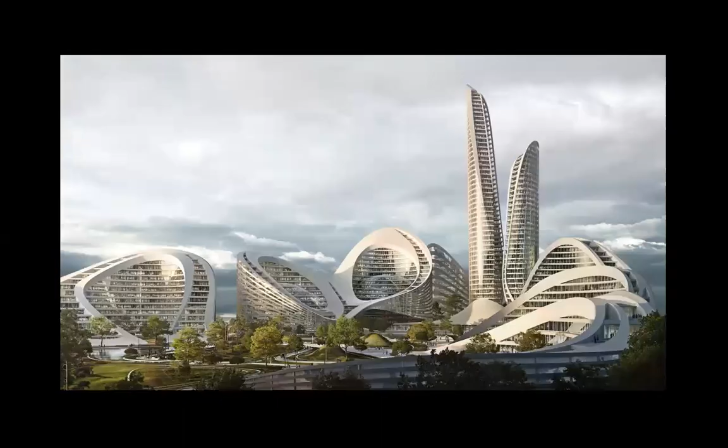The Russian mega smart city, Zaha Hadid Architects working in collaboration with others - I made this presentation before the start of the war. I personally am not very fond of this work. I find it flamboyant and not in the best taste, but that's what they proposed about 8 years ago or so.

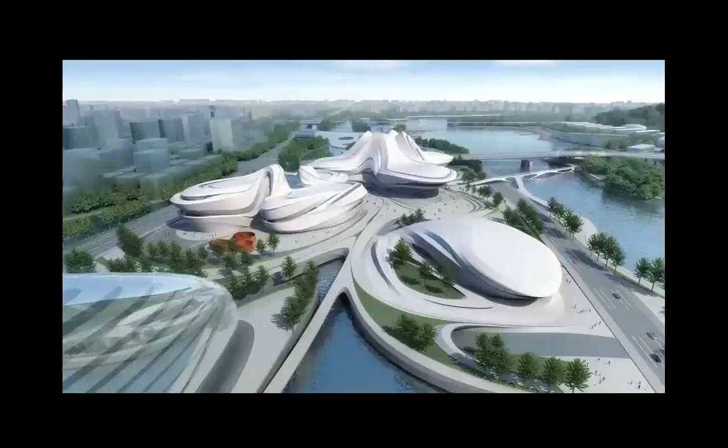This is a project in China. It's a very fine YouTube video that they created for this complex of buildings in China. Again, these are projects that began while Zaha was still alive, and developed after she died at 65.

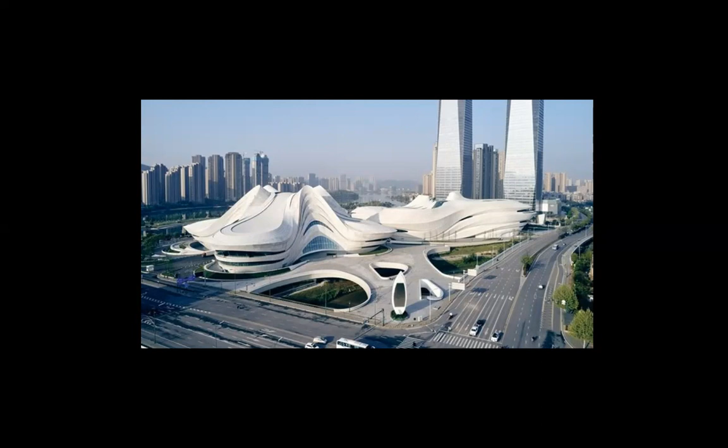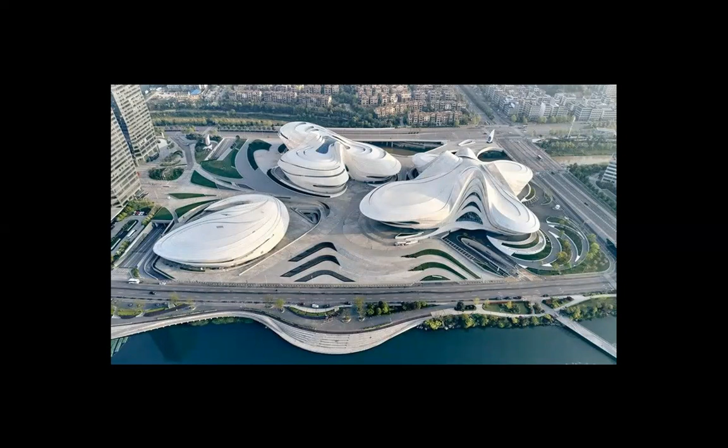What do we see here? Total fluidities and fluid totalities, to use the titles of two books published in Vienna at the Institute of Architecture by the studio run by Zaha Hadid for almost 20 years, with works of international students, 6 of whom were Romanians, published in a book I have. Anyway, this is the work in China - I don't know exactly, maybe some kind of cultural center.

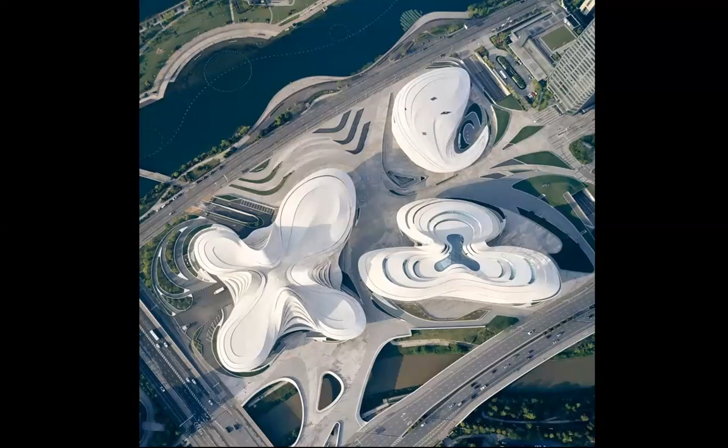The influence of Patrik Schumacher on Zaha Hadid was increasingly substantial. Five Zaha Hadid design projects were still to be finished following the architect's death.

Morpheus Hotel, finished in the meantime in Macau, was built with an exoskeleton. The structure is at the periphery of the building, and there are no columns in the interior.

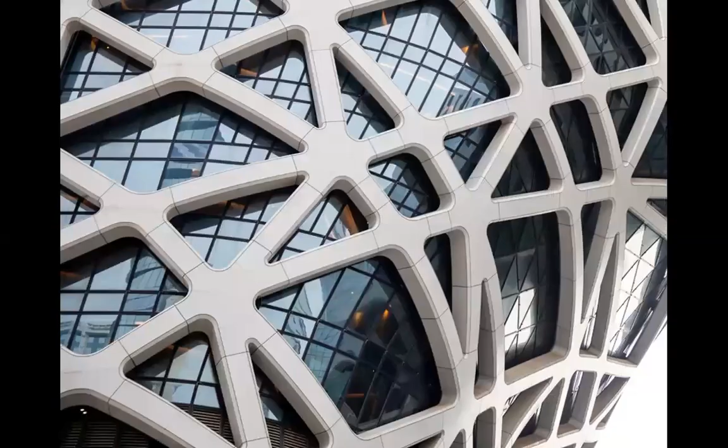Can you do this in the absence of scripting, programming and parametric design? Of course not. Impossible. You can't even dream it. You cannot draw it. You have to have very advanced digital knowledge in order not to build, but even to draw something like this.

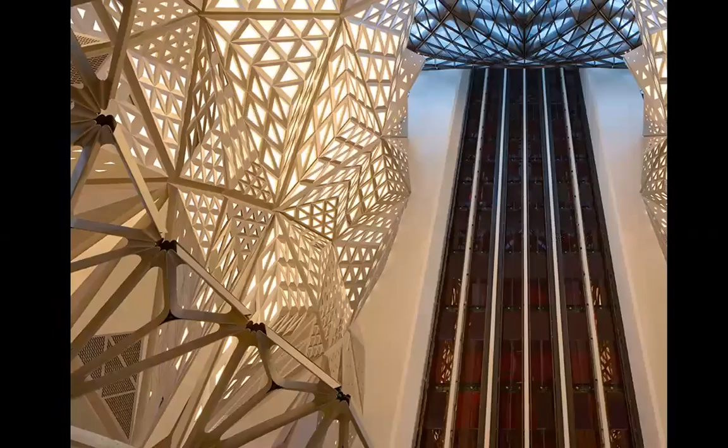A very fine work. Too bad that, yes, it is addressed to an elite. This is not for proletarians, but I guess beauty shouldn't be ideologized.

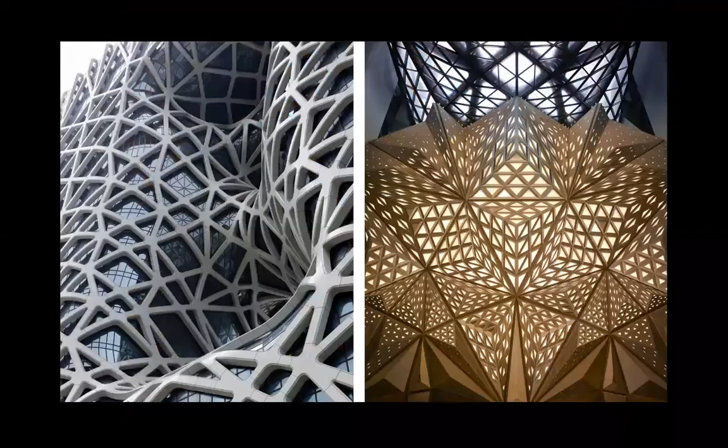Zaha Hadid and Patrik Schumacher, and of course the whole office - the work was finalized after Zaha Hadid died in Miami at 65.

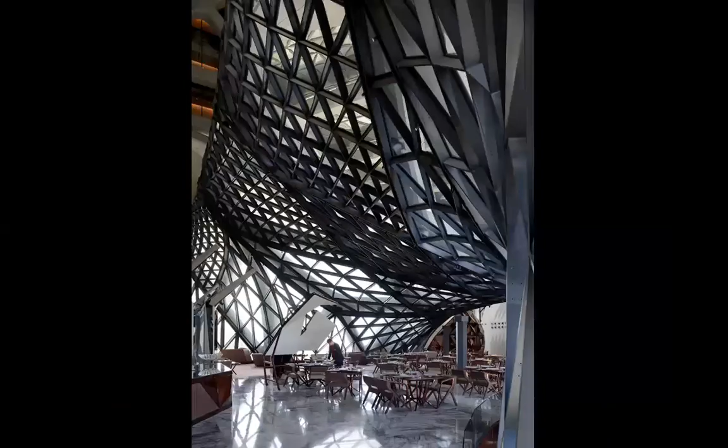Macau Morpheus Hotel.

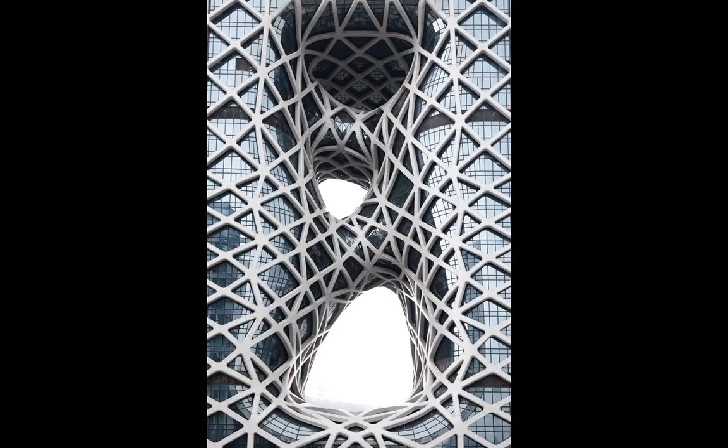Again, someone might ask what justified those holes or complexities in the center of the building. Well, this is art - you could explain it, but it's beyond the point, actually. Capriciousness and subjectivity is part of artistic creation, and it always was.

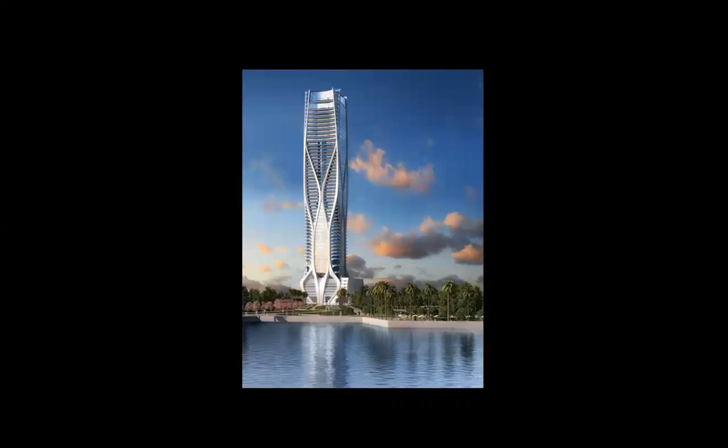She died while visiting the construction site of this building, 1000 Museum. It's not a museum, it's an opulent apartment building, very large, too explicitly phallic in my opinion. But there are some good parts, of course - very expensive, all this concrete work, which also pollutes.

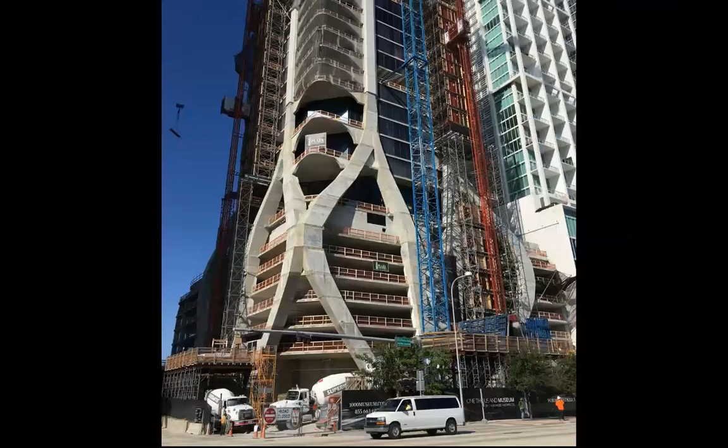But the building is still different from the left and right buildings, to an extent, formally at least. There are some dramatic parts here, which again were very expensive and employed a lot of concrete, and concrete does pollute.

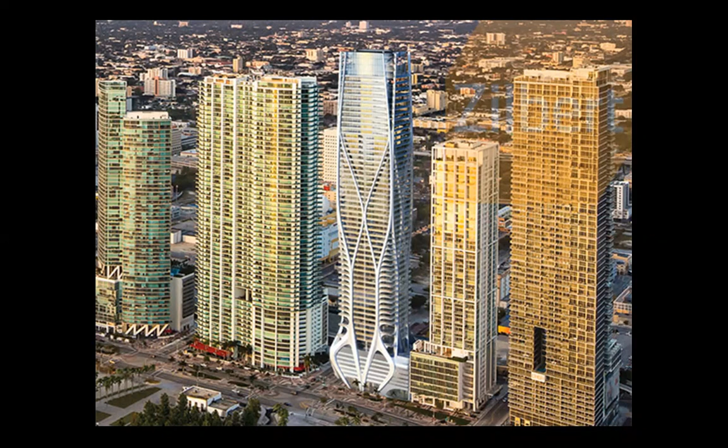Maybe her building is some kind of comment on the masculinity of the very idea of a skyscraper. I don't know. Maybe there is a subversive meaning in this building, and I hope it is. I'm not sure it is, but I hope it is.

I am a little bit skeptical that she tried to comment through her building on the masculinism of the other towers. I hope it is so, but I don't know - it's more wishful thinking on my side. But the building is more explicitly phallic than the other buildings, almost literally so.

For the rich and famous, for those who could afford an apartment here which costs millions, with balconies where you could have 100 people partying, it's built. And she died while inspecting the building site here in Miami.

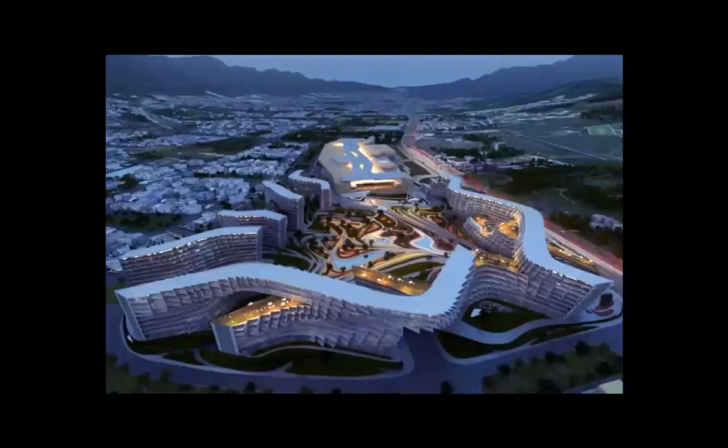Look at them. Again, for an elite in a country which knows something about poverty as well. There are many people who live in poverty, but those people would never even dream of owning an apartment in these buildings by Zaha Hadid Architects.

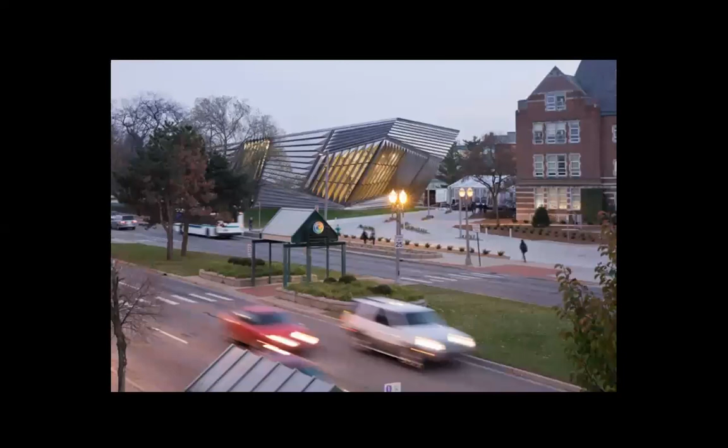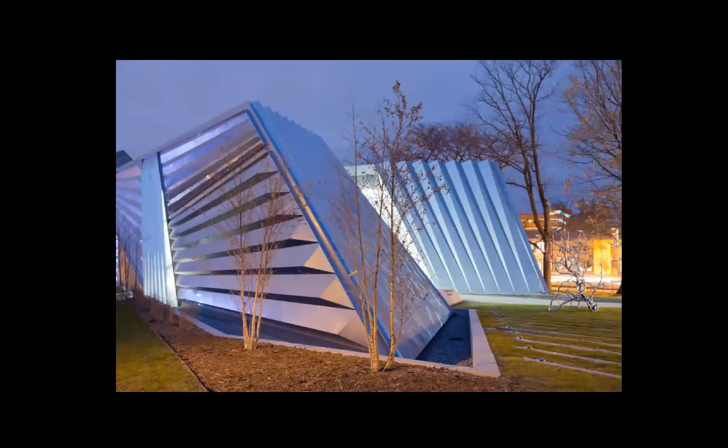And also the fact that it's not oversized. I think it's a good building in Michigan by Zaha Hadid Architects. I don't know if it was finalized only after her death. It seems so. Anyway, this is a video about this museum.

Now, Beijing New International Airport in China, it opened. In my presentation, when I made it, it was estimated it will open in 2019. It already opened, to cope with growing outbound traffic, after a record 4 billion trips were taken by Chinese tourists.

Anyway, China is building what is touted as the world's biggest airport, unofficially called the Beijing International Airport, and it is huge, and I like it more during the construction. Designed to look like a phoenix spreading its wings, construction was delayed in December 2017, last year, when more than 200 tombs from the Qing dynasty were unearthed during construction.

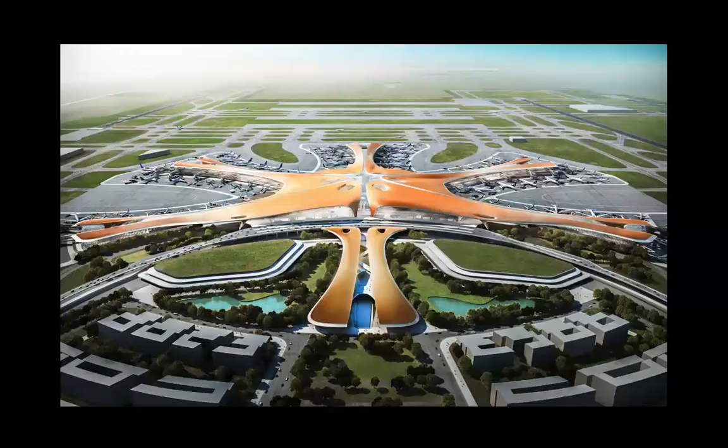And this is the airport which was built. It was very, very impressive during the process of erecting it. It's still impressive, and it is apparently the largest airport in the world. And there are so many impressive and large airports.

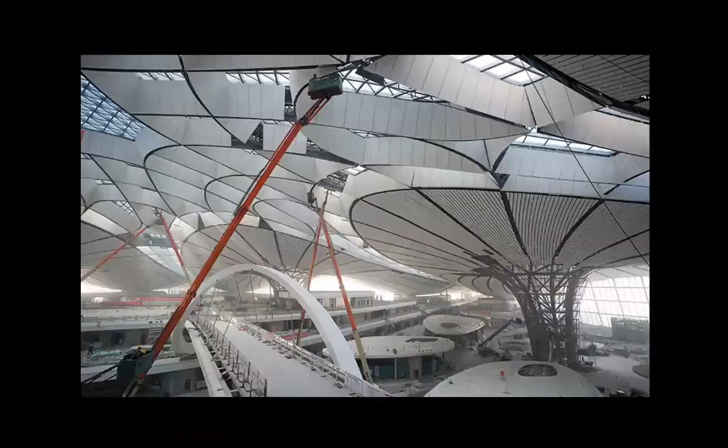If something bothers me, it's the glittering surface on which the billion tourists walk. Can you imagine an army of cleaning people would be needed to keep this shining floor still shining? I personally don't like the final result as much as I like the building during the construction, because at the end, everything is a little bit too white for my taste and too slick.

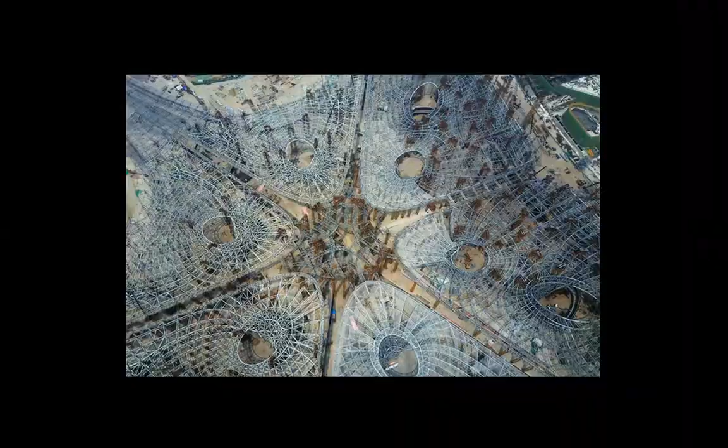But during the construction, this airport is out of this world, was out of this world. And now you'll see some images during the construction at the building site. These were, anyway, let's hope. Yeah.

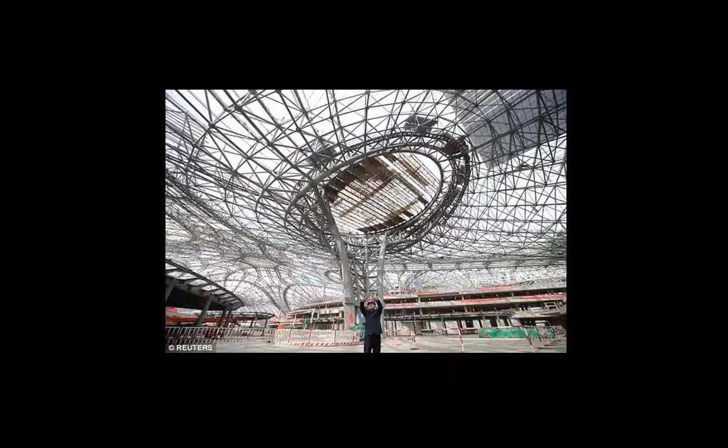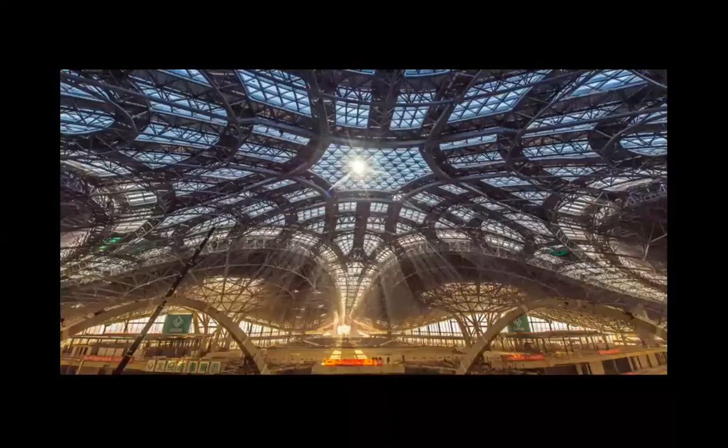I mean, yes, a very expensive building, no doubt. But the complexity of the structure is breathtaking. And what they were able to achieve in their office to create the project for this massive building. Look at this, just the steel structure of the roofing is unbelievable.

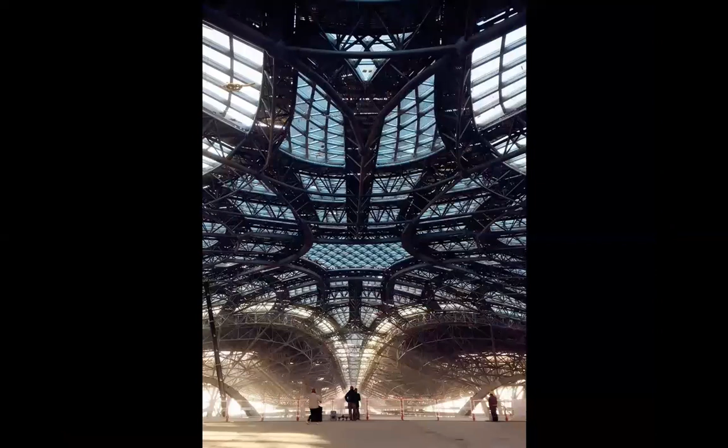Too bad it's not so visceral and so explicitly breathtaking and so provocative, even through its darkness, in the final iteration. But I think even l'ingénieur Eiffel would have loved this very much if he saw it.

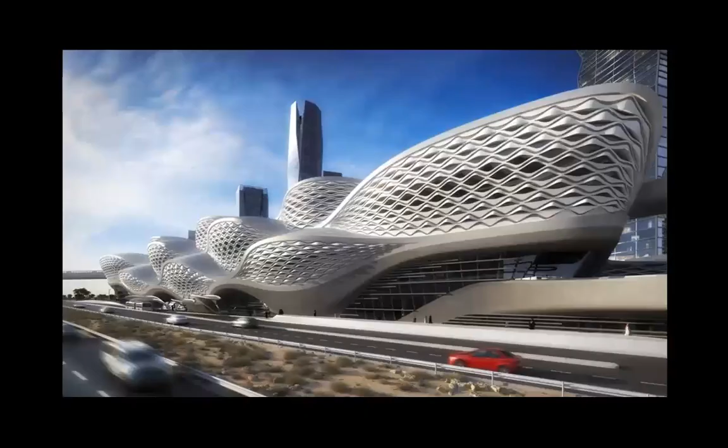This was a project, but it was realized later in Saudi Arabia, a metro station. Someone wrote: beautifully designed project, has all the distinctive trademark curves of a Hadid structure. For my taste, it's a little bit rhetorical, if not demagogical. I mean, should a subway station look like this?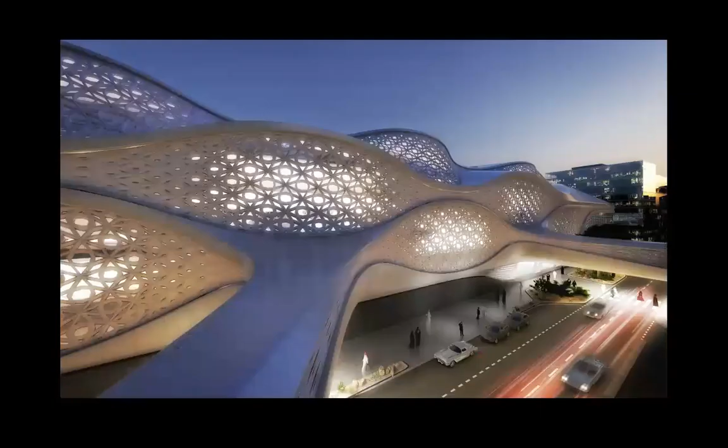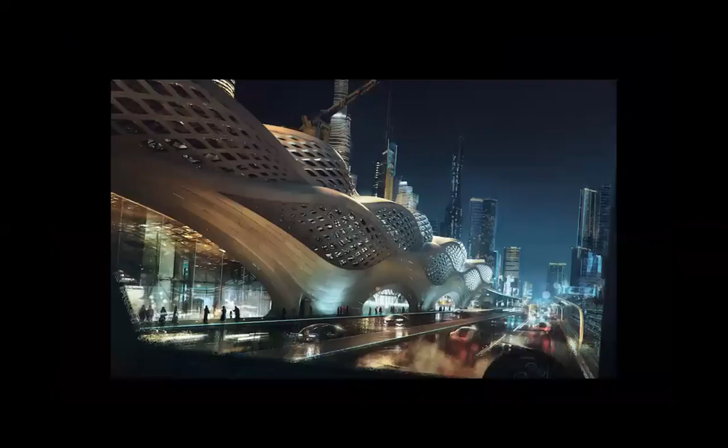I don't know. We also see the appearance of ornament. Ornament is very explicit here. In many of the later works of Zaha Hadid Architects, ornament does appear.

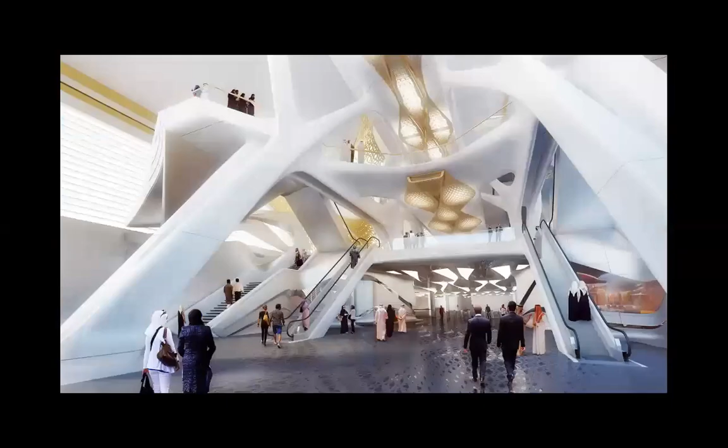The project, it was built. I don't have the latest pictures. Again, in my opinion, too much whiteness and slickness at the interior. But this is something that surprises one when you think that Zaha Hadid claimed that she was looking for an architecture that was raw, vital, and earthy. Maybe it is vital to an extent, but it is not raw and it is not earthy.

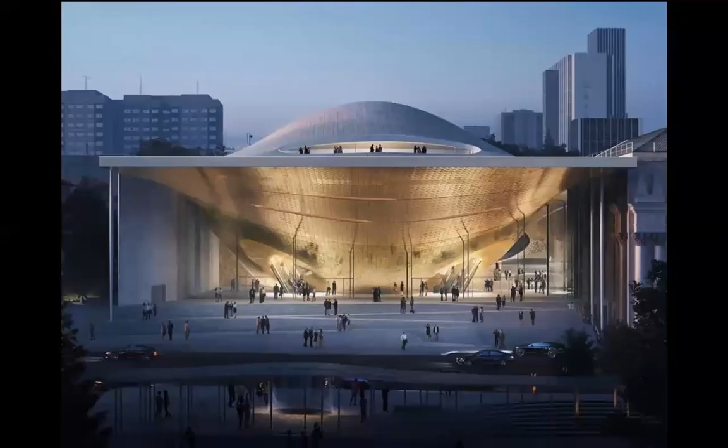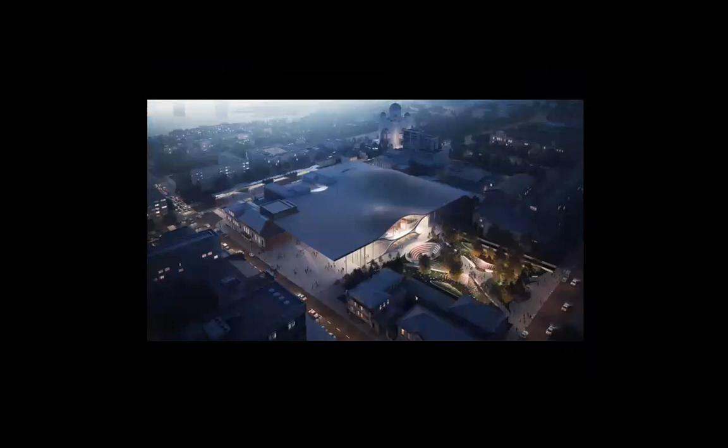It's possible they started, but when the war in Ukraine began, Zaha Hadid Architects removed themselves from Russia, and so did Sir Norman Foster, but not Wolf Prix. He remained convinced that he built something for the people of Sevastopol and not for Vladimir Putin. That's how he justified the fact that he didn't turn his back on Russia after the war in Ukraine started.

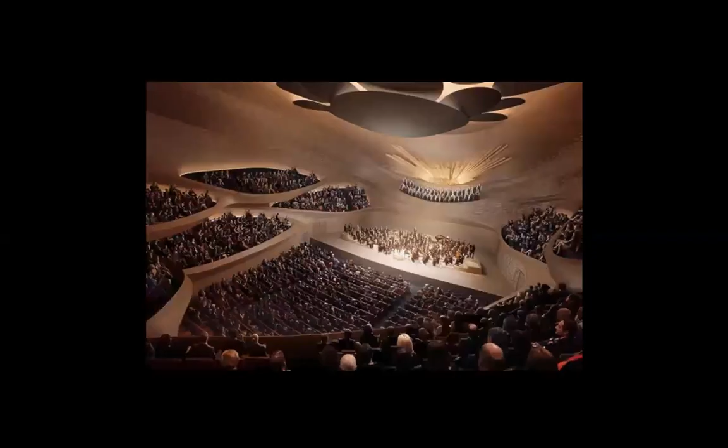Anyway, I will not read this text now about this concert hall that the Russians applauded and were ready to build. They won the competition for it to be built.

You know, the artistic director and principal conductor of this Ural Philharmonic Orchestra declared that for musicians, this new hall is crucial. It will be a musical instrument that brings the sound to life. And there are, of course, very sophisticated videos about it.

And now we arrive at the very end of this short, imperfect presentation about Patrik Schumacher and Zaha Hadid Architects, because I wanted to show this fragment from a presentation he made, where he arrived at the conclusion that modernity had certain epochal styles, as he called them. One was modernism, the other he called parametricism, and subsidiary styles in modernism started for him with functionalism, organicism, rationalism, brutalism, metabolism, high-tech, and then there were two transitional styles, postmodernism and deconstructivism at the end of the 20th century, and then in the 21st century, parametricism with the subsidiary styles foldism, blobism, swarmism, and tectonism.

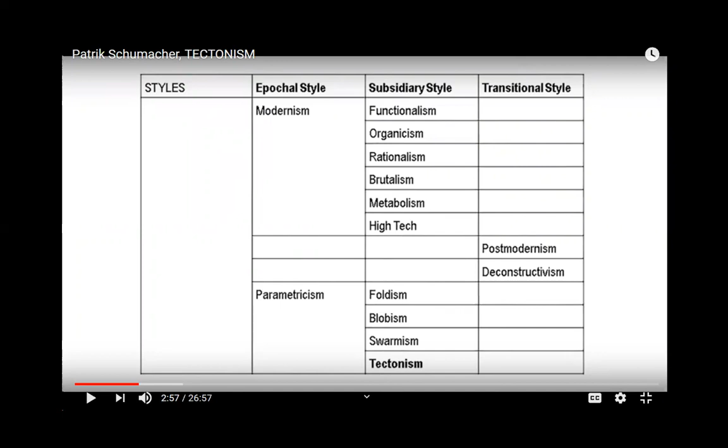And Tectonism, as you saw here, this was supposed to be the latest arrival on the scene of architecture as a subsidiary style before the arrival very recently of artificial intelligence. And as examples of Tectonism, I think he realized that excessive whiteness and excessive lack of texture and excessive slickness is detrimental. So he correctly, I would say, found some parallelisms and even inspiration in Gothic architecture. So parametricism could emulate the imagination of the architects, as long as they do not forget tectonics. And tectonism refers to tectonics, materiality.

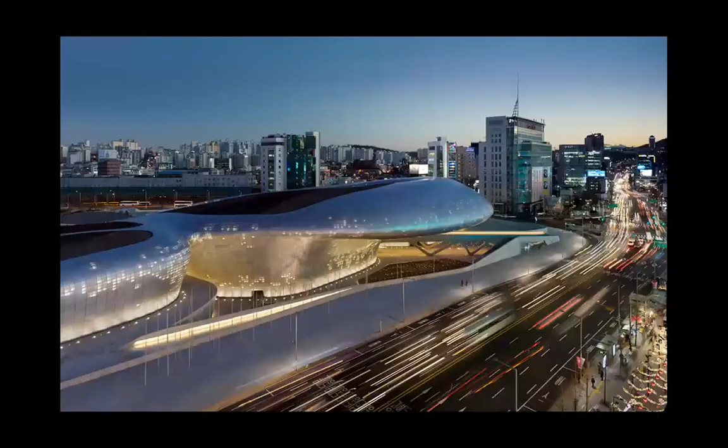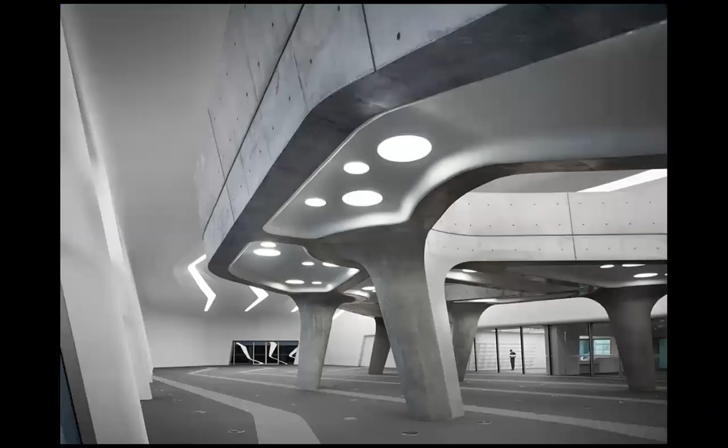This is a work, in my opinion, one of the best works where the influence of Patrik Schumacher was appreciable, but at that time Zaha lived. It's a massive work, very fluid indeed, and very well kept under control. We remember the diagram, moving towards freedom, but also moving up in terms of order and disorder, if you want. It's a mega structure that contains all kinds of functions. It's amazing how they made this possible, how they made the project itself to be crystallized.

Again, I think it's a deficiency of their architecture that the interior is so without anything raw or earthy - in other words, without anything that Zaha Hadid claimed were her main interests, to be raw, earthy, and vital. But otherwise, the building is amazing. It's not about the scale that is so impressive - of course, the scale as well is the fluidity of the whole building.

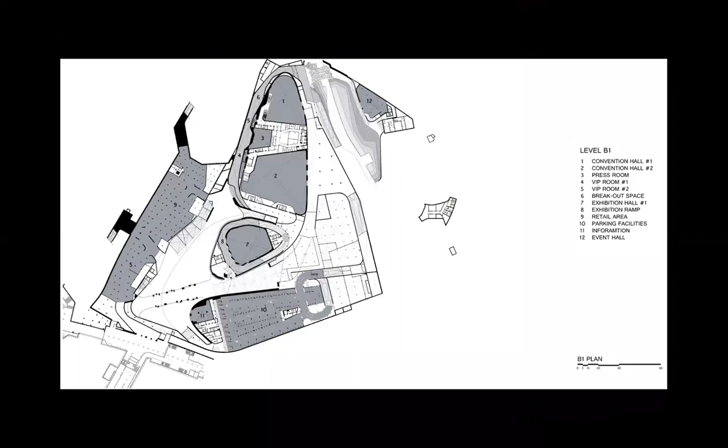In Seoul, in South Korea.

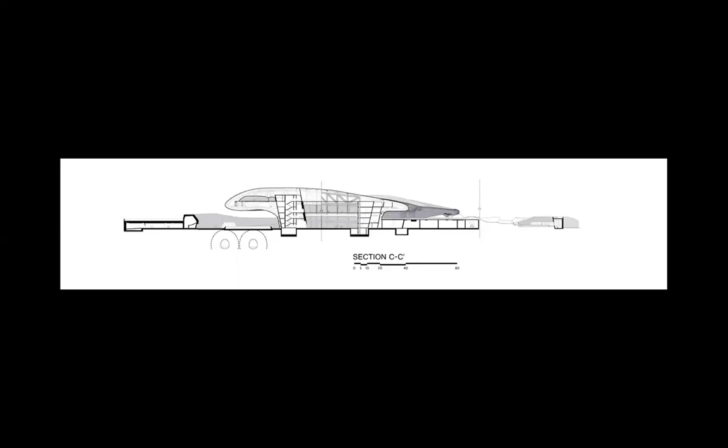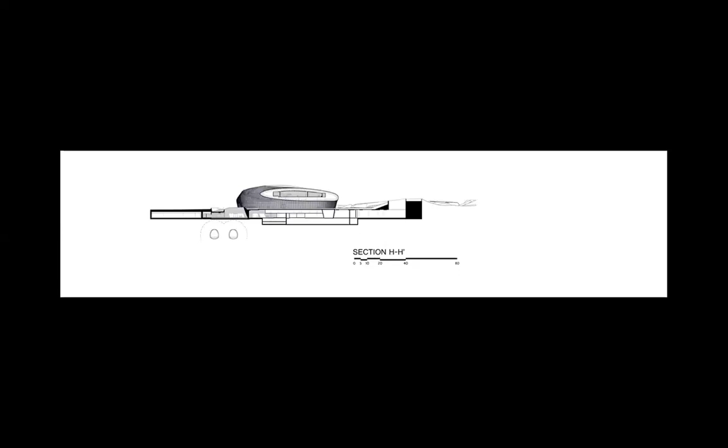I take these images from Arch Daily, and they are very rigorous. They give a lot of drawings, but these drawings are a little bit too clean for my taste, too correct, and they tire me off after a while.

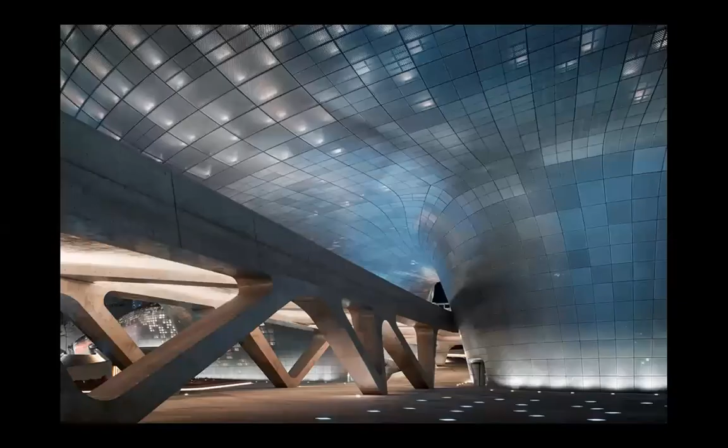Anyway, the building is impressive from many points of view, and it was built by these adventurous architects, Zaha Hadid, Patrik Schumacher, and their whole office, 400 and something innovative, creative, ambitious, talented, knowledgeable architects. Bravo to them. Well, maybe I can subtract from that bravo a little bit when you consider how much concrete they use here.

And yes, concrete pollutes. Maybe in 2014 there wasn't so much talk about pollution, but that talk started to happen not much later.

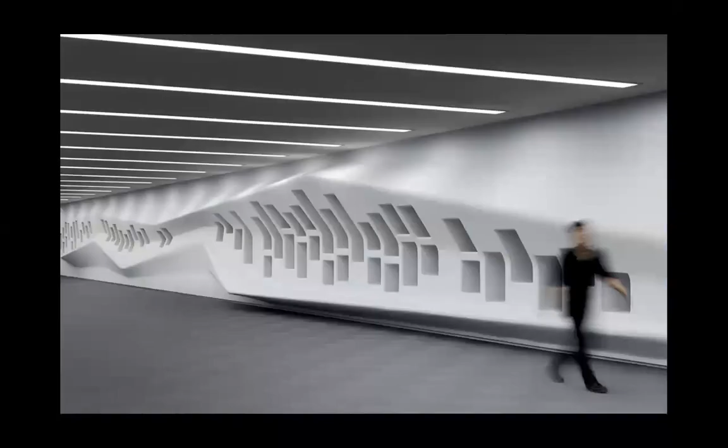Too bad that this white glittering slickness is somehow in contradiction with the very idea of creating a building that is a vortex of energies. I'm surprised they didn't realize this, that this whiteness is conceptually in contradiction with the whole idea of a new architecture that they try to promote.

I visited the library Zaha Hadid architects built in Vienna, and it's the same. Inside, excessively white and smooth and slick.

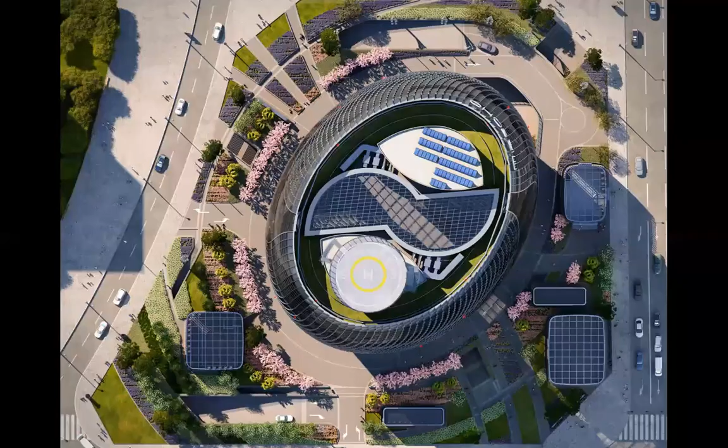What is this in Beijing tower? This was built after she died. Just as you see, it was built. China. I wonder what Mao would have thought of it. Would probably die for a second time.

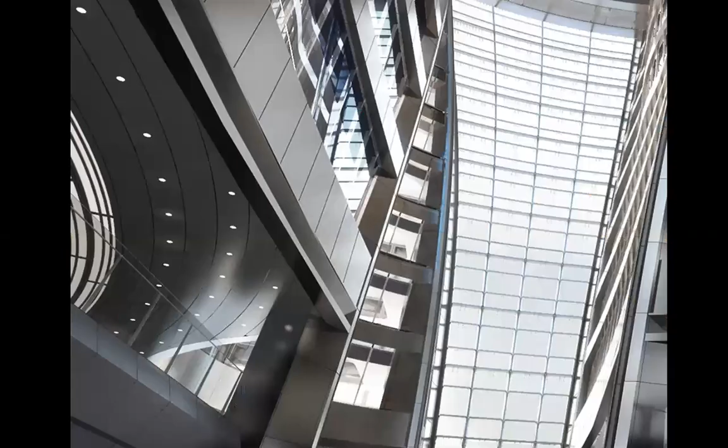Too much glass, if you ask me, too much air conditioning, but the demagogy of glass still claims its victims, and we are the victims, and the electrical bills are the consequence. I guess these people can pay those electrical bills.

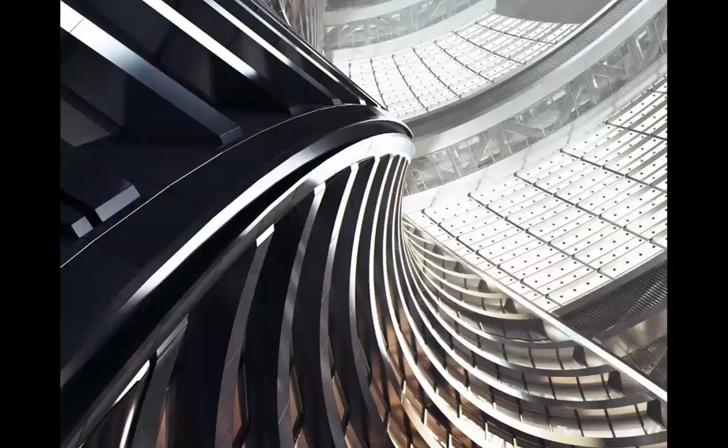Again, during the construction, I think the building is more convincing than the final, the finalized work, in my opinion. Exactly because it has a level of rawness or roughness, which in the final built work is absent, and certainly from the outside.

A phallic presence, although cut in two somehow. As with our Macau project, they wrote, it is important that the mega atrium is not a hermetic space, but also visually connects with the surrounding urban fabric. This reduces vertigo and enhances the sensation of freedom. Entering this space delivers a viscerally uplifting experience reminiscent of the tallest Gothic cathedrals. This too is in architecture's power.

And what is this in Wuhan? That is before the pandemic. Apparently, the pandemic started there, right there in that city, Wuhan.

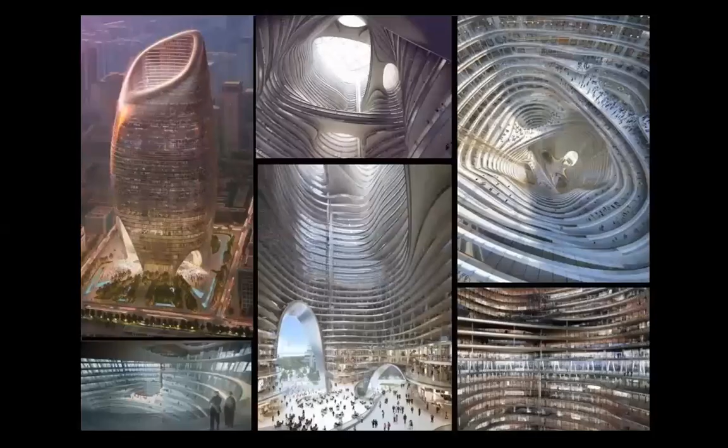So Patrik Schumacher on high intensity urban order, he wrote about this, and he gave us as examples this building and similar buildings.

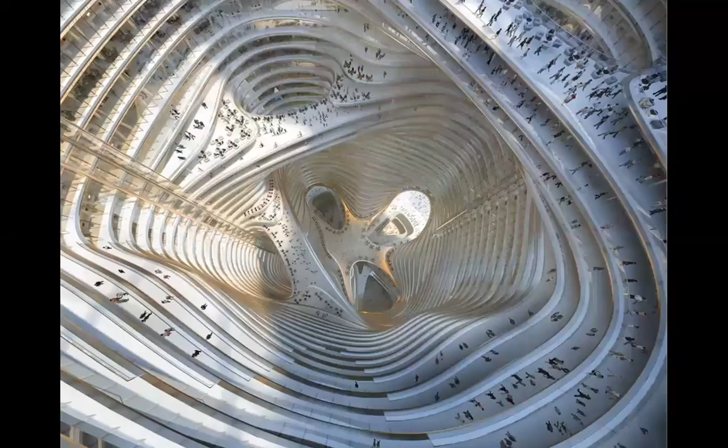I don't think he believes too much in rurality and in the village. And I'm not sure if Rem Koolhaas does either, although he staged the mega show at the Guggenheim Museum some years ago about the importance of the village or rurality.

But what kind of a rurality could you have, when you are serving clients like Prada? What does Prada have to do with any village in the world?

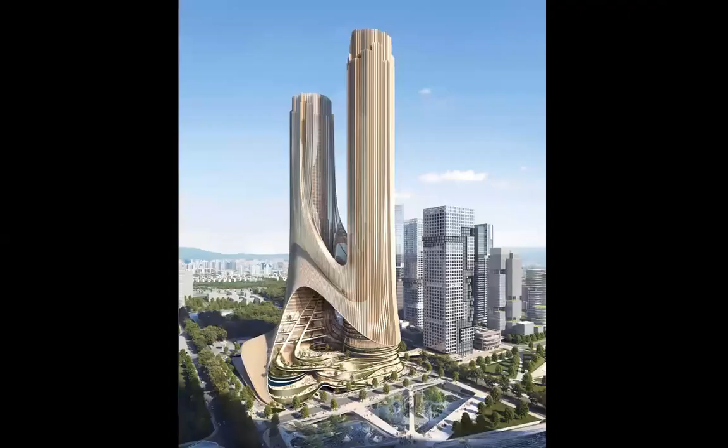Zaha Hadid architects to build Tower C at Shenzhen Bay, super headquarters base. My God, another project that was initiated after Zaha Hadid died.

Personally, I am a little bit turned off by the splendor of these towers, which celebrate in essence the arrogance of Anthropos. Yes, it is impressive in a way that humans like me and you were able to conceive and even draw, visualize this, and they are able to build it.

But in essence, it's a celebration of capitalism and a dubious joie de vivre while we know very well that climate change is real, we know that the icebergs are melting and the levels of the seas are rising.

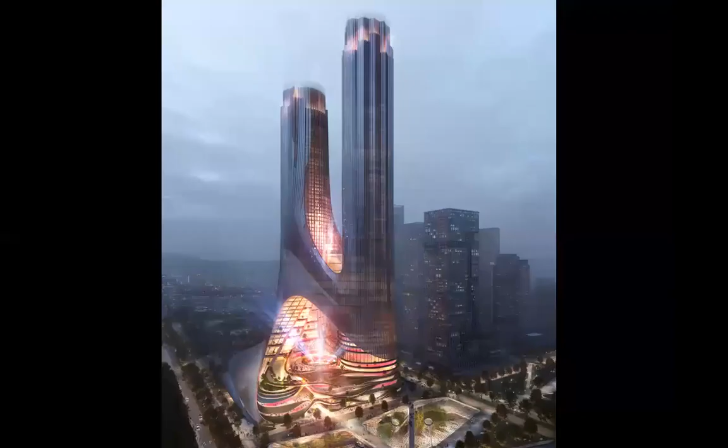So not everything is right in their architecture, in my opinion. And the poor trees, they are tolerated, so to speak, on certain floors, up to a certain level, being forced to grow out of concrete slabs instead of growing from the earth.

But Patrik Schumacher does stress, and this is important, I think, that ornament and structure are not separate. And I wrote it a few times actually, but maybe once is enough: ornament and structure are not separate. Thank you, and happy birthday, Patrik Schumacher.